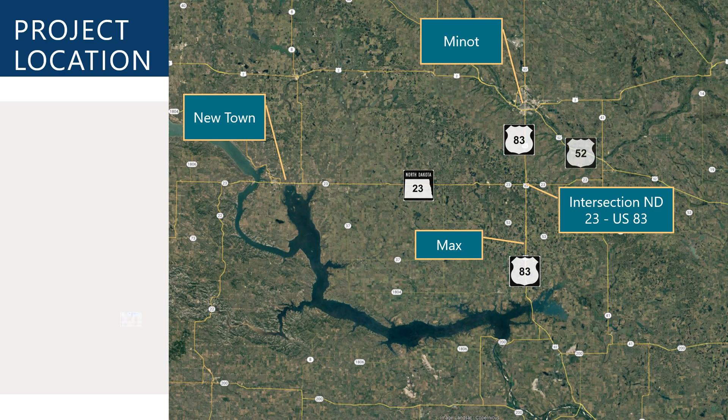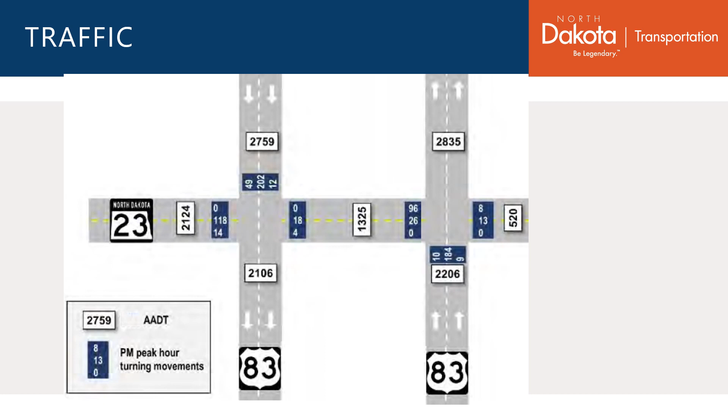This intersection sees about 2,800 vehicles per day, with a majority of them heading from the Minot area to the New Town area, and/or from the south up towards Minot and even again towards the New Town area. So as you can see here, the blue are the peak turning movements per hour, and the white is the total per day counts.

So over the last few years, this intersection has had several crashes, and many of them of the crash type that we do not want to have if there is a crash. In the last few years, there's been 10 minor crashes. Those are defined as these types of categories: property damage only, which is the PDO, and possible injury, which is minor injury or unknown injuries.

The non-incapacitating injury, these are ones that occur but you'll recover from, such as a broken arm or nose or finger, things like that. Those ones are fine if we have them. We'd rather not have any though.

But these are the ones that we absolutely don't want to have on our intersections, and they are the incapacitating injuries. These are injuries that if you had this accident, you would not recover from it because you have something that permanently changes your life, such as a loss of a limb or brain damage, something along those lines, or of course fatalities, and we don't want that.

So this project is set up so that we can't have these types of crashes, because we can't always completely eliminate them, but it would have a low likelihood of having these types of crashes. And that's what roundabouts do, because when you have a roundabout, you end up having crash types that are more side swiping versus a direct T-bone type, which is a lot of times fatal and ends up being those last two crash categories.

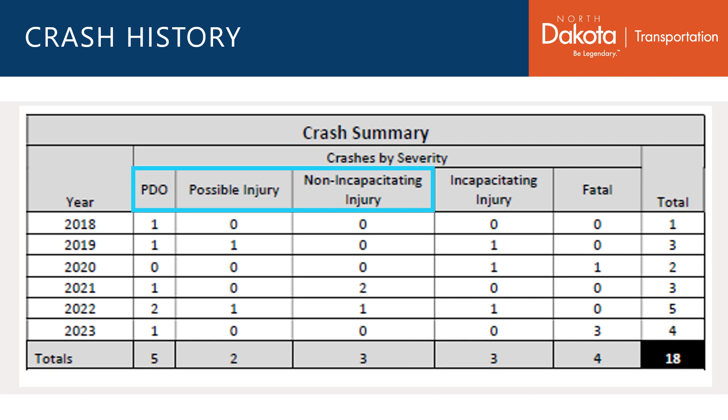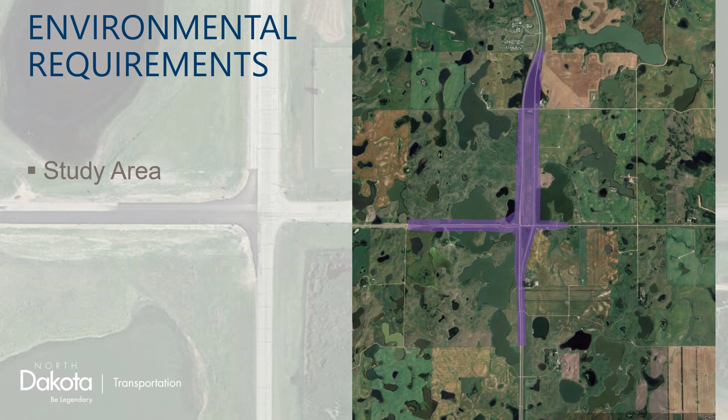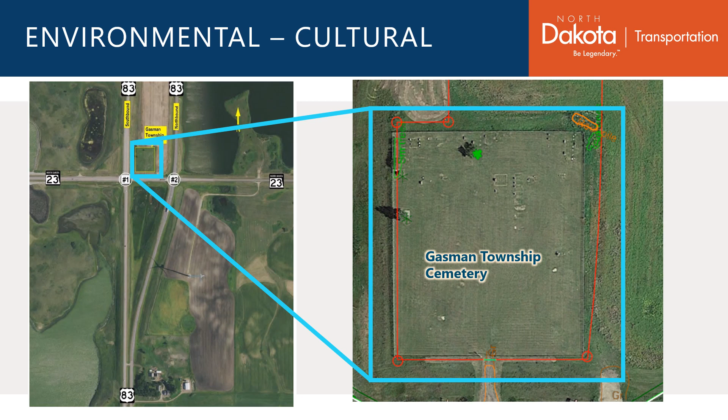So when we do a project, we usually have to do an environmental clearance for that project. And when we do a project, we usually have to define our study area. Right here, you see the area that is our study area. And in that, we've looked at different things such as cultural. In this case, we actually have a cultural site with the cemetery that's right there in between the two major

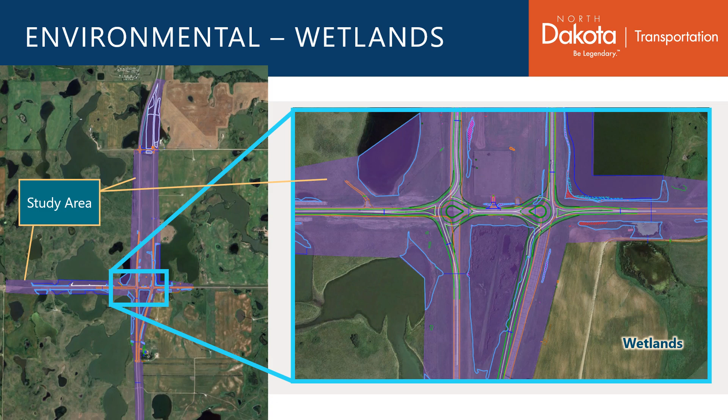intersections. We also have looked at wetlands in this area, and you can see there's several wetlands all over the place. And when we are doing the analysis, we have to look at the impacts of those wetlands. We also look at our right-of-way and the impacts of the right-of-way. Right now, we're trying to design the project so that we do not have any right-of-way impacts, or if there is some, that they are mostly temporary right-of-way impacts. But there may still be some permanent and/or temporary impacts to the areas.

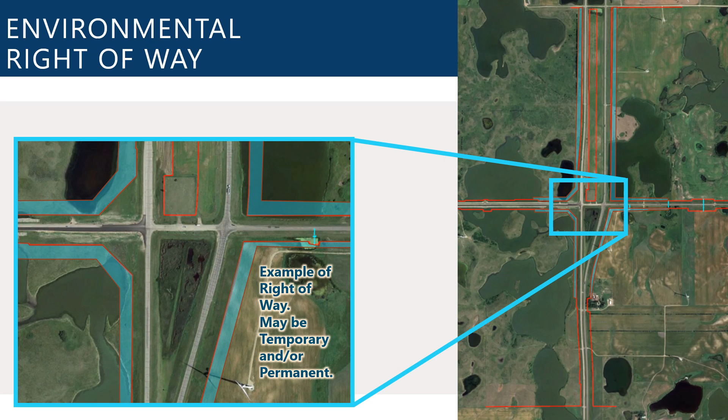If we do have to get right-of-way, it most likely would be kind of similar to how we've shown, where it would be like maybe parallel strip taking. But our goal, honestly, is to not have any if we don't need it. But in case we do, that is probably what it would end up looking like.

So when we looked at the roundabout design, we looked at our design vehicle, which is a WB67, and that's like what you see a lot of times on the interstate system when you see a semi truck going out. And then we also looked at how we are to accommodate other vehicles, because at this intersection over the last 3 years, we've had approximately 18,000 permitted oversized, overweight trucks.

And that includes like heavy haulers, lowboys, wind tower blades. Those are just a few examples. Houses, you name it, they've gone through that intersection. And so we want to make sure that we design the majority of the roundabouts for these types of vehicles, but we need to also make sure we can accommodate these other larger loads.

So how did we do our roundabout analysis? We looked primarily at our design vehicle, that WB67, and we wanted to make sure that it could go through these intersections with relative ease. One of the first things that we wanted to make sure is that in both the north-south directions, you could have two WB67s side by side,

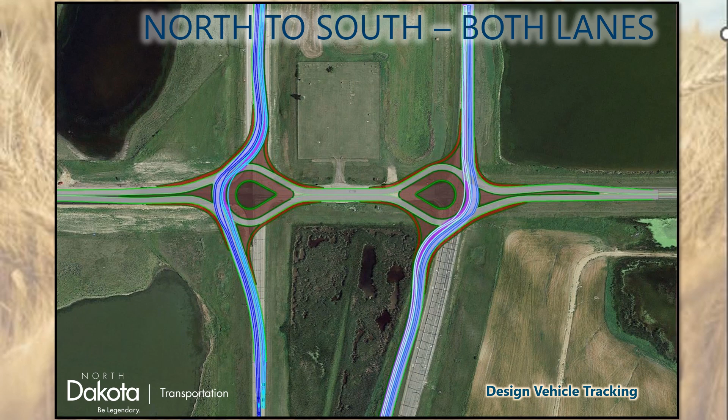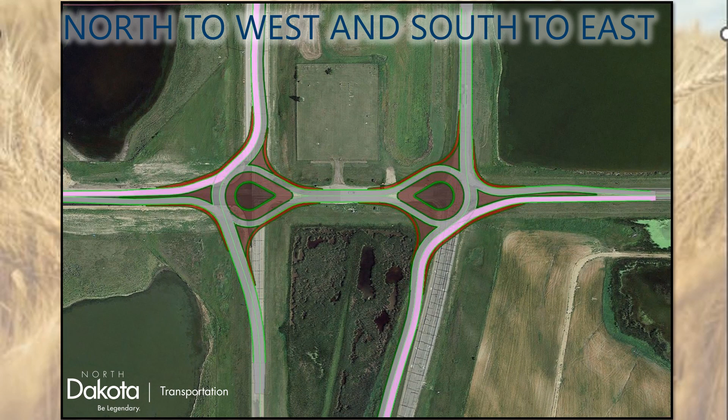Again, this is for that WB67, and like you can see here, when you do that left movement, they are going to be using a little bit of the truck apron, but that is how those are designed. That's what they're for, and at times they end up using some of the truck blisters also, but the majority of the time they are in their lane assignments. This is the west to north movement, again similar to the previous one, and then the west to south and the east to north movements.

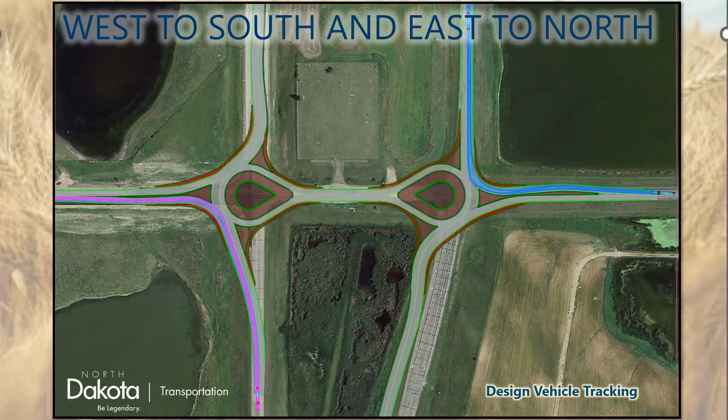So we wanted to show you what it's like to have these vehicles go through this intersection, and this is an example of a semi that goes through. You can also see some of these other vehicles. Some of them are just continuing on. Some actually go into the roundabout. Those who are coming into the roundabout always yield to the existing traffic and go on through.

I'm going to play that semi really quick one more time, because as the semi comes around the roundabout in this area, you'll watch that they track a little bit on the back tires, and that's what we anticipate happening. That's what that truck apron is actually for, is that movement.

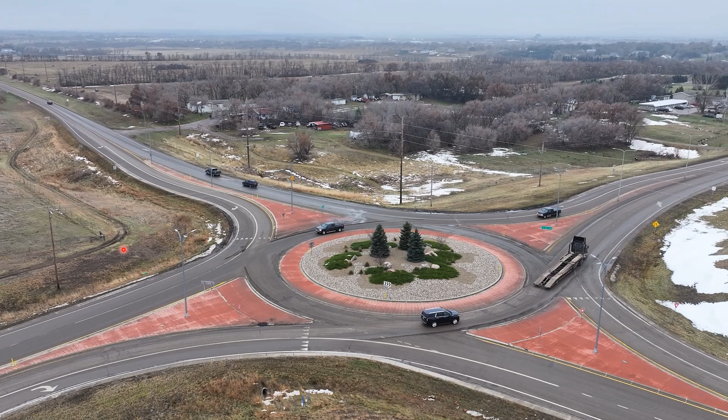And we wanted to look at all of the different movements with some of those larger vehicles. We didn't look at every vehicle because that's 16,000 of them, but we tried to take a broad range of them, and these are just a few of them. And then we also looked at what is the most constraining movement, which is most likely that left-hand movement, which would be like from the south to the west or from the north to the east. And so we looked at how that operates when it comes to these oversized, overweight loads.

So this is the lane assignments and the tracking that occurs with that accommodated vehicle. This is for the lowboy. You can see the tracking of it, and this is for the heavy hauler. And what we did, you can see here, we went through the roundabout backwards. Your normal way would come in here, and then you would do this and come through. But these larger vehicles, this is too small to go the normal way. And so we have a different movement that they would end up using, which would be using it backwards in this area and coming through.

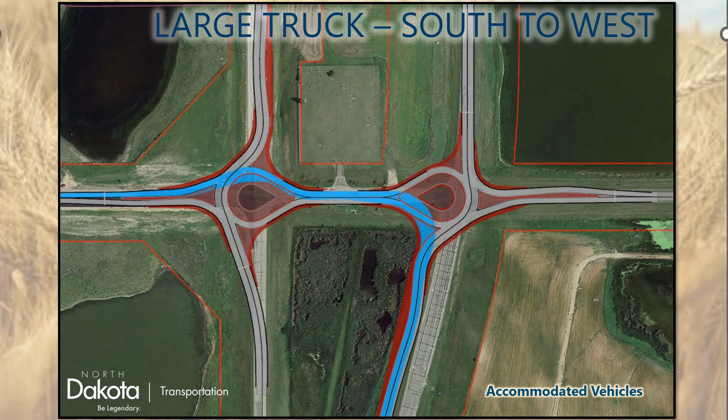So the way we designed this is so that those vehicles could go over this on those heavy haulers. And most likely when a situation like this happens, there's pilot cars and those different types of things. And so when they come into this intersection, those pilot cars and everything would have to shut the intersection down to get those vehicles through, and then they would continue their movements. So here is the most difficult movement, which is the left movement, and this is the example of the north to east. We did look at all of them, but south to west, and then this is the lowboy example and the heavy hauler example.

So one of the things that we have to look at and consider is how to do the work zone traffic control while the construction is being done, and how to make sure we can get as much traffic moving as possible. For this project, because a majority of the work is right in the middle, we need to do it in a way where we don't have to get into this middle intersection of the road. And one of the things that we looked at doing was adding parallel roads. So while the work is being done on this west side, a parallel road would be used.

Another avenue is using turnarounds, and so we have this parallel road here being used, and then if you need to, say, get to the east, you would do this turnaround and come, or if you need to go to the north, instead of coming through and going up, you have to come down here and then go up, or the other way around. If you need to go south and say you're coming from the east, you would come up here and then come down.

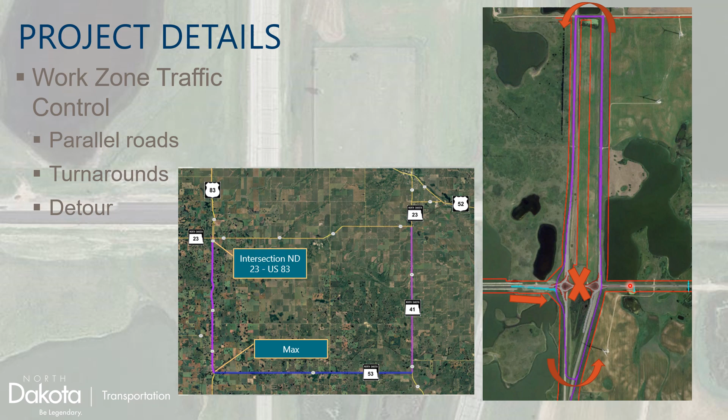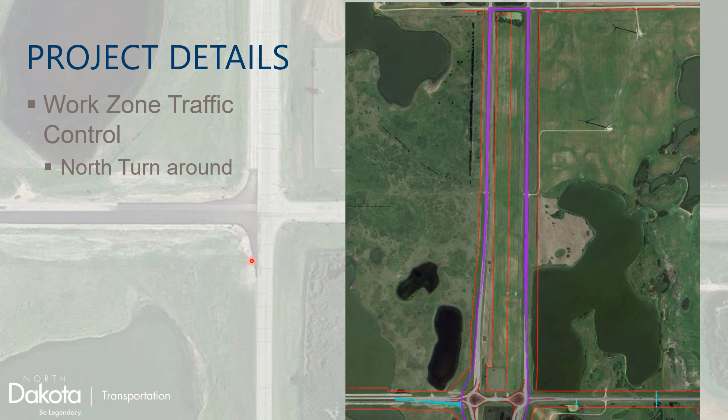So there will be a season where vehicles have to essentially go opposite direction for a short period of time until they get into the right direction and essentially go into those turnarounds. There also will be a season when this east portion is being constructed that a detour will be needed, and we'll go into that in a little bit. So for the north turnaround, it would look something like this. And the south turnaround would look something like this.

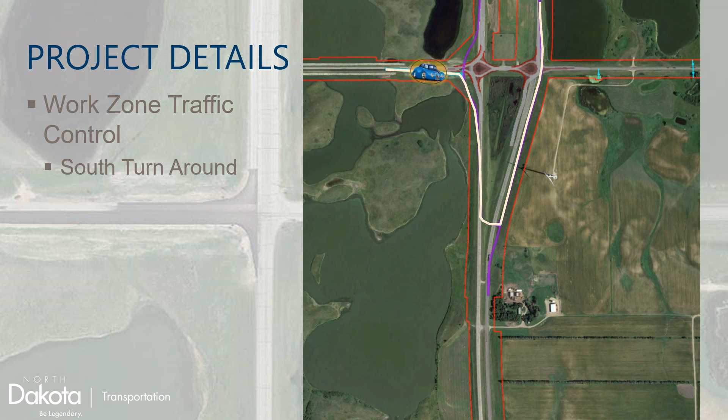And then for the phasing, one of the first phases would be doing all of this interior work with the roundabouts themselves, and then we would have a parallel road where it's just a single lane on both sides so that the vehicles can go throughout. The east and west traffic are able to also run as normal, as much as possible during construction, while this work is being done.

The next phase, which is phase 1B, is where we will end up having the roads still have a little bit of stuff. On the west side, we would have this mostly open still. This is for phase 1A, and then phase 1B is where just this chicane is being constructed and these connection parts are being constructed.

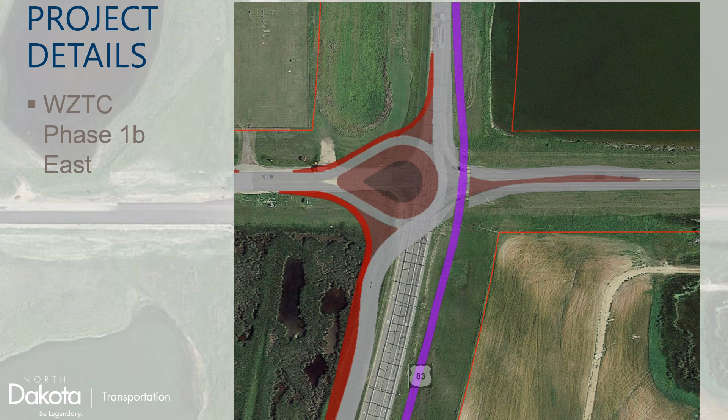Phase 1A is on the east side, consists of being able to construct the inner portions of the roundabout, but the chicane for the east side is not able to be made until we implement a detour. The detour is then for phase 1B, and that is when we end up having a leave out here, construct the chicane, and the people who want to go east would have to actually come down to Max over on 53 and then back up onto 23 to continue their route.

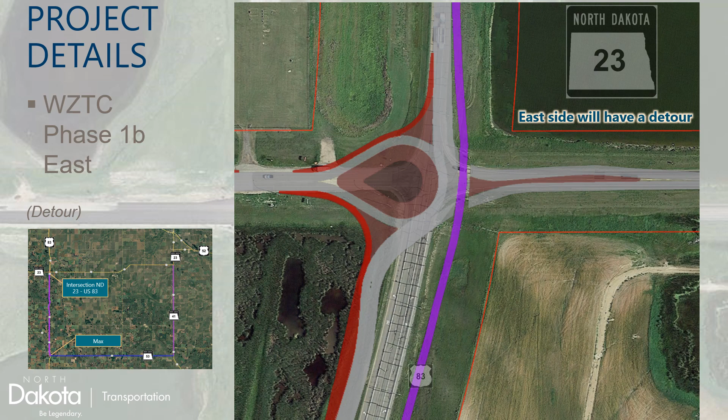That detour length is approximately 40 miles long to be able to construct that, and we're looking at having it for approximately 4 to 6 weeks for construction. And here's a view of the detour again going down to Max and then over.

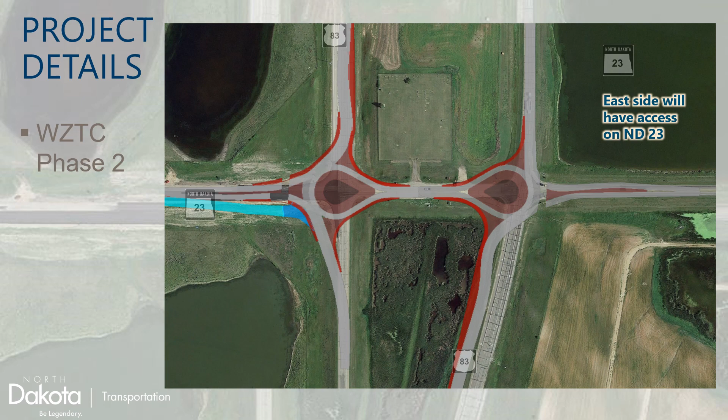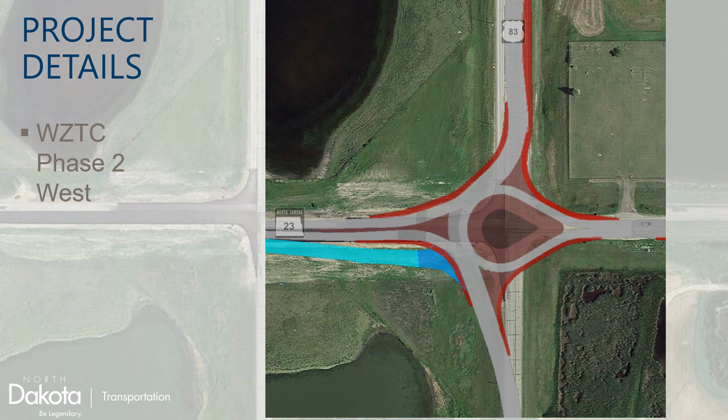For phase 2, the work zone traffic control is to get these leave out locations then paved, and the phase 2 west would look like this, where you would end up having a connection kind of from where it was before out to the roundabout. They would end up using the roundabout like normal while they're constructing this area.

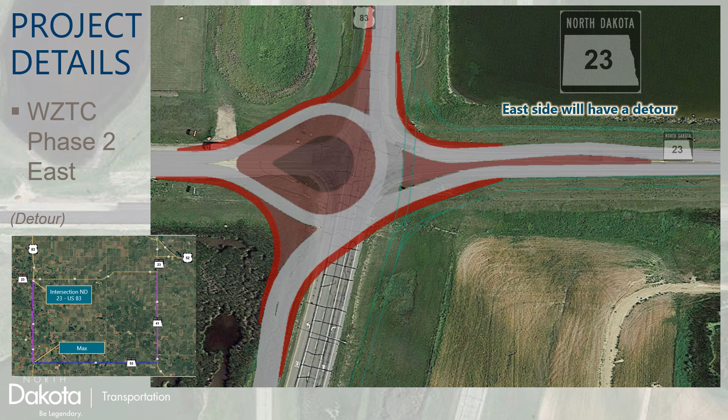For the phase 2 east, that's for connecting this little part in here. The traffic control would primarily use the main roundabout in the area, but unfortunately we do not have enough space to be able to do parallel roads, and so we again will have to have a detour to finish these little connections, and again that's part of that 4 to 6 week

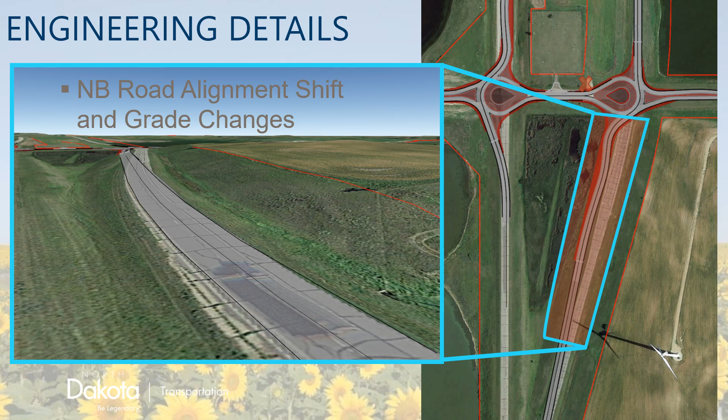for the detour. Other components on this project, just on the south part as this northbound lane is going up, there's a little bit of grade differential, and so we want to shift the alignment and fix some of the grade going on in this area. Another thing that we are needing to do is closing this eastern approach here, but this one to the cemetery will remain open.

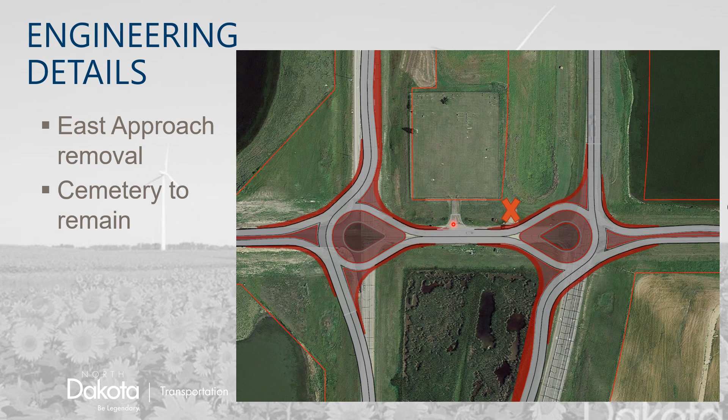In addition, we will be needing to have borrow and waste sites. And so if you have property in the area or pretty close to this project location, we would love for you to contact us. One of the ways you can is by scanning this QR code, and then inside just give us your name and contact information and say you're interested in a borrow and or waste site.

Thank you again for your time this evening and for your time online. And we appreciate any comments that you might have. Well, the reason we're here is because we desire your comments. Please send us your feedback, and you can do this several ways. If you're in person, you can do it by filling out the information at the table, or you can scan the QR code on the screen, or you can go to the website that you see there.

Another way you can do it is by emailing me at jleinram@nd.gov. That's JLEINREM@nd.gov. Please note in your subject heading US 83 23 Public Input Meeting. Or another way you can do it is by sending in handwritten comments, and you can do so by making sure they're postmarked by December 21st.

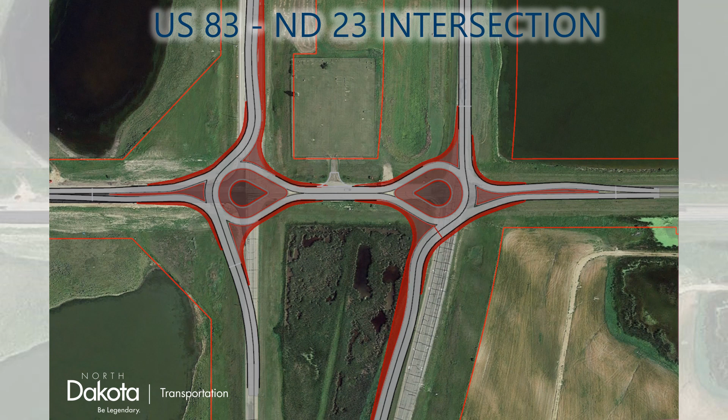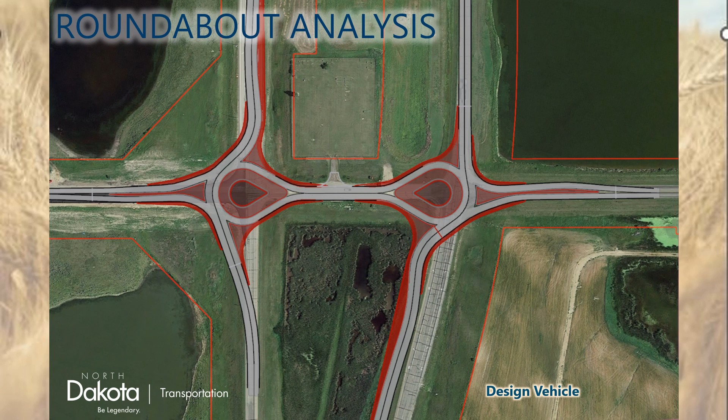Larger loads. So how did we do our roundabout analysis? We looked primarily at our design vehicle, that WB67, and we wanted to make sure that it could go through these intersections with relative ease.